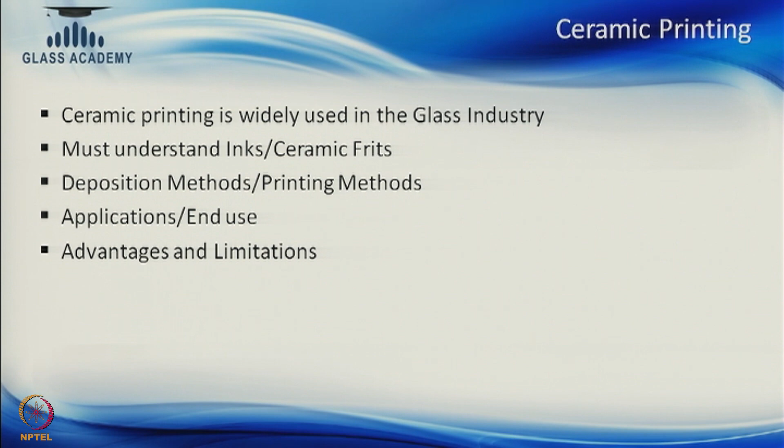There are limitations and advantages to ceramic frit printing, as there are with any other material, so we will dwell on that as well. Ceramic printing is essentially inorganic ceramic frit, which is deposited on the glass surface through various application methods.

Glass frit is essentially very small granules of glass itself, as seen in the image. It's crushed down pieces of glass, which is then added with pigment, an inorganic pigment which gives the color - different metals will have different colors - and that's mixed with the glass frit. Then a medium is added, which is a solvent that carries the glass frit and pigment onto the glass surface.

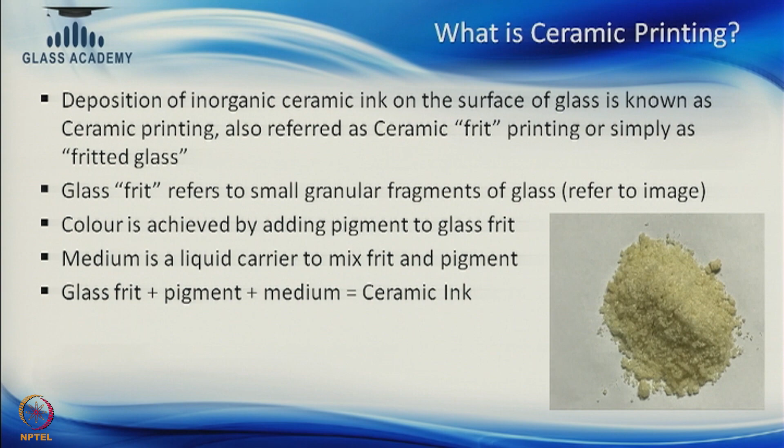So essentially ceramic ink is glass frit, pigment and medium put together - all three combined give you ceramic ink. Ceramic ink is different from any other ink out there because it embeds itself on the glass. Unlike other inks, which have just a chemical attachment to the glass, this fuses onto the surface of the glass.

We can print through three methods: screen printing, which is better for doing patterns and designs; roller coating or roller printing, which is essentially for solids or single colors in more volume and better uniformity; and lately digital printing, which is inkjet printing on glass, which really increases what you can do with printing on glass.

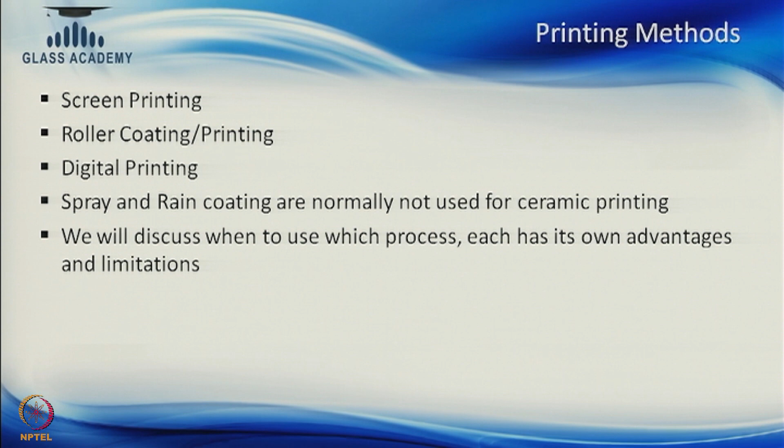There are other methods like spraying and rain coating, which are normally used for lacquering, but are not suitable for ceramic frit printing because the depositions are too thick and don't suit the ceramic frit. Each of the processes has advantages and limitations, and we'll go through them to understand them better.

Ceramic printing is different from other inks and printing methods essentially because of the ceramic frit. The ceramic ink has a glass frit, which is transferred onto the glass with something called a medium, or solvent, which carries the glass frit and pigment on the surface of the glass. The frit particles soften when fired at a high temperature and fuse onto the surface of the glass, forming a continuous layer bonded chemically and mechanically to the substrate.

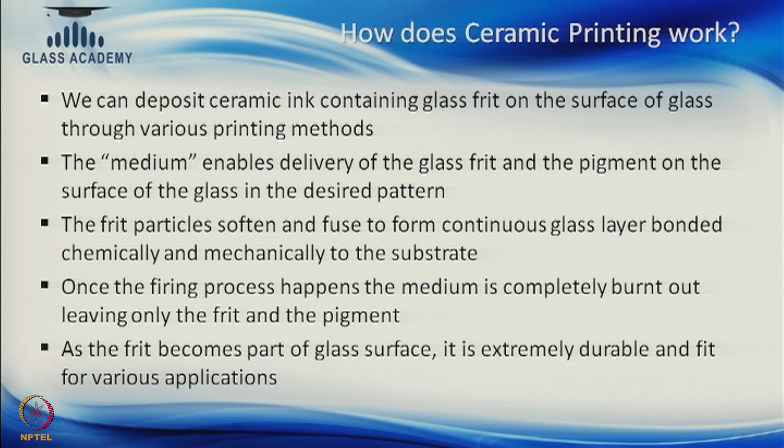The hardness of this material makes it usable for various applications which other inks cannot be used for. Once the ink is fired, the medium completely burns out - it's just there to deposit the glass frit onto the glass surface - and this makes the ink very durable and fit for many extreme applications.

So what are the advantages of ceramic frit printing? It's essentially like bone china - it never loses color, never fades, and is fit for external use. It is UV resistant, so it doesn't fade. If you use other lacquers on external surfaces, they will fade and lose color. There are very few inks out there which do not fade with time, but ceramic frit printing, since it's a part of glass, is very resistant to fading, and is also resistant to acid and alkali attacks.

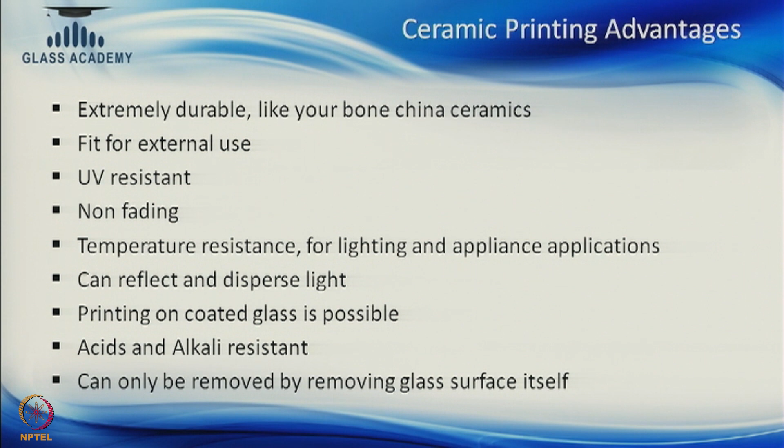With all the acid rain and chemicals out there, other materials do deteriorate with time, but you can print on a variety of glass substrates. You can print on coated glass, although not all coatings - we have to check with the coating manufacturer before printing on each coating, and with the ink manufacturer as well, but it's definitely possible and done worldwide. You can also print on side 1, the outside side, which is also great. There are certain applications where the temperature of the glass rises - ovens, toasters, grills, lighting applications - so this kind of ink is perfect for those applications and is widely used across industries.

There are certain limitations for the ceramic frit as well.

Metallic finishes and very shiny surfaces cannot be made. Inks are not essentially mixable as some other forms of ink. This is due to the glass frit itself. Because there are actual particles of glass, the glass particles will not fuse into each other, so it's not that easy to mix these inks.

They cannot be printed with normal printers and conventional techniques. It doesn't work on a CMYK pattern, meaning you can't have just 4 base colors and have multiple colors come out of it. So there are limitations with the inks.

The colors are not as vivid as some of the organic inks. You may see certain lacquers where the reds really pop out or the oranges really pop out. It's lesser so with ceramic frit, although the inks are improving every day and becoming more vivid as we go along.

Some colors will have heavy metals, and because of that, certain colors will not be possible in certain countries where heavy metals are not allowed.

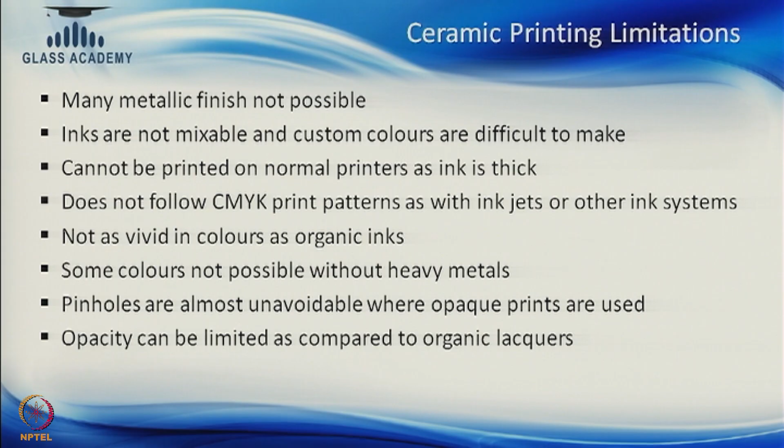Pinholes and opacity in the ceramic frit will not be the same as organic printing. This is an inherent problem with ceramic frit because the glass frit has to embed on the surface of the glass, and because of that you cannot have too much pigment going in. Opacity will be lighter, so for certain applications it may be better to use organic lacquers.

Internal applications widely use lacquered glass for the same reason.

There are a variety of applications that ceramic fritted glass is used for. Facades use it for letting less heat in, reducing the solar factor and adding a design factor to the glass. You can use it for wall cladding applications, various industrial applications. All your cars, all your windscreens normally have ceramic frit printing. The ovens, toasters and grills you use every day, the glass chimneys, the glass hobs you see, spandrel panels in facades is an important application being used more and more these days, and you can use it in n number of positions.

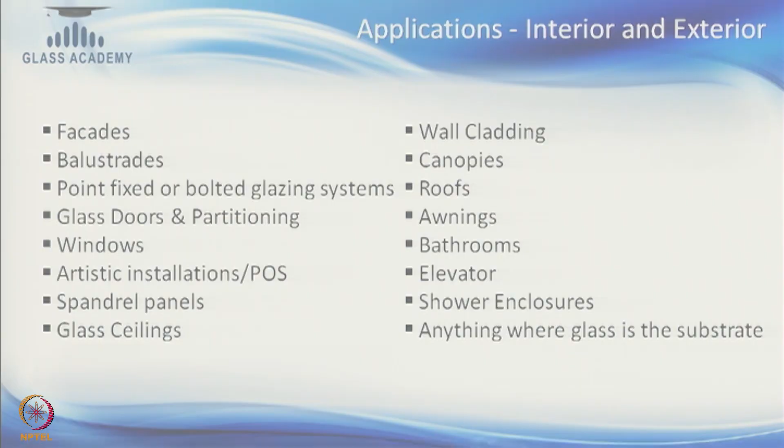Bathroom shower cubicles are becoming digitally printed these days, which really adds to the aesthetic appeal of the bathroom. So yes, there are many applications where ceramic frit printing is used, and the use continues to grow. These are just a few examples.

Skylight with ceramic frit will allow less heat and light to come in, although we can control the amount of light that's coming in. So maybe even a 50% frit will allow enough light into the building, while still reflecting off 30% or so of the light back. You can have many kinds of frit patterns on skylight applications, and it is widely used in skylights.

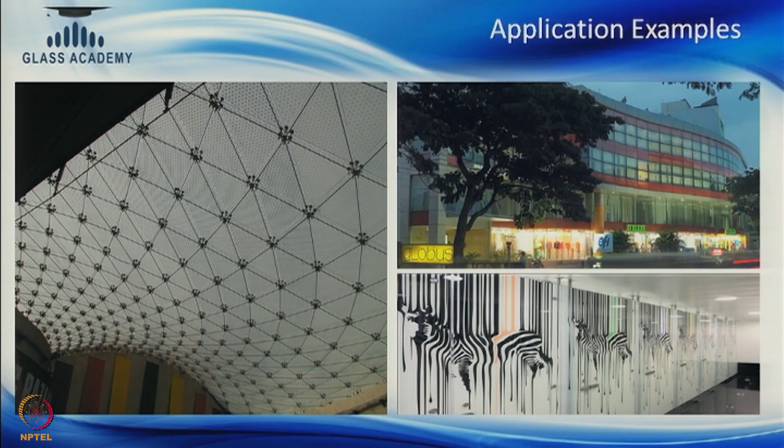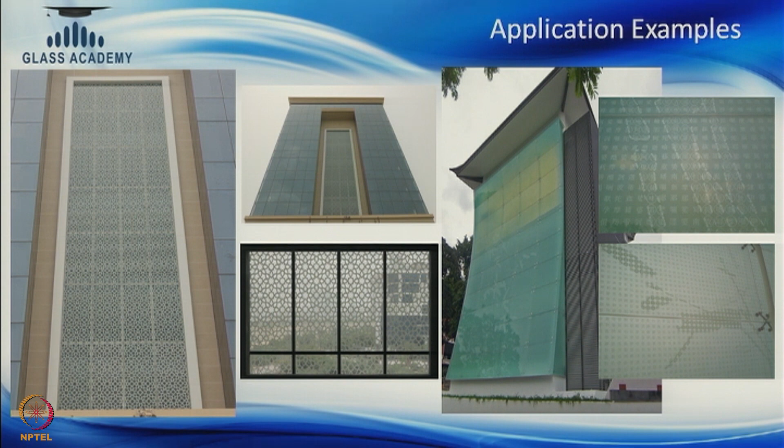Other examples of wall cladding or other areas of the buildings are also shown here. Digital designs can go all throughout the building, meaning you can have multicolored prints and add a design feature to the building. So really, the applications are endless.

Now let us move on to ink selection. Ceramic frit is not just a homogeneous one kind of ink. There are many ink options available. Ceramic inks can be solvent based, or they can be water soluble or water based.

Solvent based inks are traditionally what have been used since a long time, and water based inks are now becoming popular. Inks can be leaded, unleaded, or heavy metal free as well.

But certain colors like reds normally have cadmium and other toxic elements, so it is difficult to achieve a good red without some heavy metals. A lot of work is going on with that.

Leaded inks, because we know lead is toxic, are banned in many countries, and fumes from the solvent based inks are generally harmful. So you need to wear masks, be careful how you handle it, and have certain precautions while using the print, and it is not that easy to dispose of.

Cleaning agents for cleaning the glass and the frames are also harmful, and that is how water based and water soluble inks have become more popular. They are more environmentally friendly compared to solvent based inks.

So, solvent and water based inks - I will dwell on this a little bit more. Solvent based inks are traditionally available, they are cheap, easy to use, and faster to print. That means you can print a lot more glasses with solvent based inks before you need to change the process or change the ink.

Solvent based inks generally carry harmful chemicals, including VOCs, volatile organic compounds, which are toxic. The degree of toxicity varies based on the ink used. Not all solvent based inks are the same - some are lead free, some are heavy metal free. But even heavy metal free is a percentage, and you still need to clean it with solvents, amyls. The emulsions are also toxic, so the entire ink system is not very environmentally friendly.

Then there's water based inks, essentially made with a water base with some co-solvents which may also have VOCs. It's not as if water based inks are completely without heavy metals, but there is a range for these as well. Essentially, water based inks can be cleaned with water, meaning fewer chemicals are used to process it, and you get better inks with less heavy metal content compared to solvent based inks. So the best business practices across the world are moving to water based ink systems.

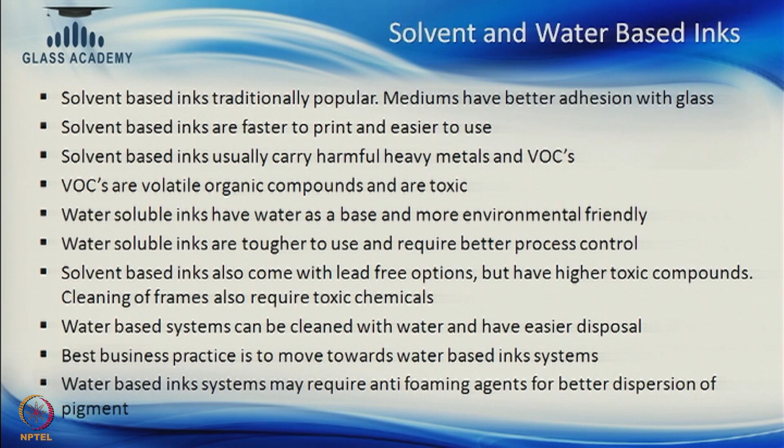We talk about ink a little more because in order to get the ceramic frit right, you need to get the ink right. That is the material you are printing with, and if the ink is not correct, your results will not be good. So let us understand how the ink is made.

The premixed frit and pigment sometimes come in powder form, and can be further mixed with a machine called the 3-roll mill. This is generally found with the ink manufacturer, but it's important for you to understand how it's done. With the 3-roll mill, the glass frit, pigment and medium get mixed well - you cannot do it with normal stirring or a simple machine.

The medium is the carrier for the glass frit and the pigment, and the ratio at which the pigment or medium has to be added is recommended by the ink manufacturer - it is not constant. We have to constantly see how the glass is being printed and at what viscosity we are getting the ink.

To check the viscosity, we use something called a Brookfield viscometer or a Ford cup - instruments to check the viscosity of the ink. The pigment and glass frit come in a particular viscosity, and you add the medium to increase or reduce the viscosity, with certain recommendations on what it should be. This depends on what you are printing and which exact process is being followed. We will get into the details when we get to each process.

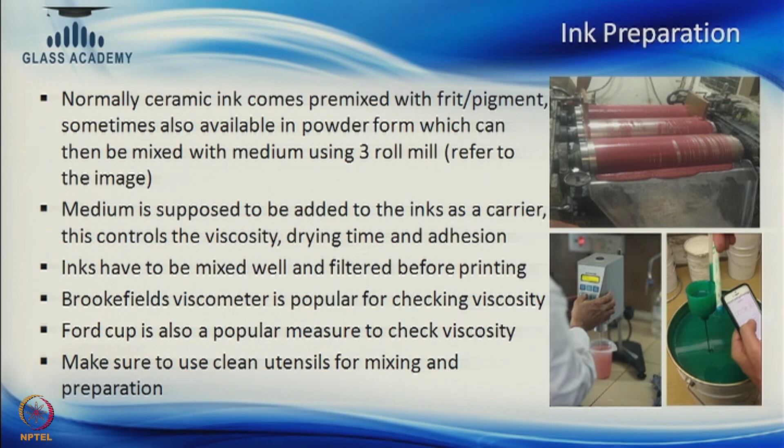For right now it is essential to understand that we have to control the viscosity, know whether the ink is mixed well, use clean utensils, and check all of these things before we start printing. It's not as easy as mixing other inks.

Ceramic inks, as I explained, have glass frits, so they don't essentially merge into each other. You can mix them and get certain colors, but when you print them, they may appear different from different angles. So ceramic frit mixing is a complex issue. There are many claims saying we have ceramic inks which mix well, but the results have not been consistent - it's not the easiest thing to do. Even in the same ratios, when you mix the inks, results may be different or may be viewed differently from different angles. The essential reason is that the glass frits don't merge with each other.

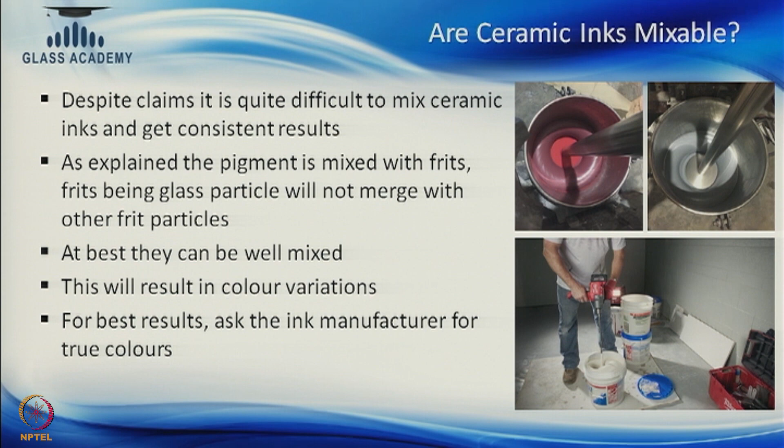At best, they get mixed well within each other, so there will be color variations. I strongly recommend having the original pigment from the ink manufacturer, especially in projects where the glass has to be a continuous glass facade. You can get pre-mixed pigments from the ink manufacturer - it does take a little time, but that is the most consistent way to get a uniform color.

If you do mix inks, make sure you have a single lot for a single project, otherwise the colors are very difficult to repeat. You will not get the same uniformity that you get with pre-mixed pigments.